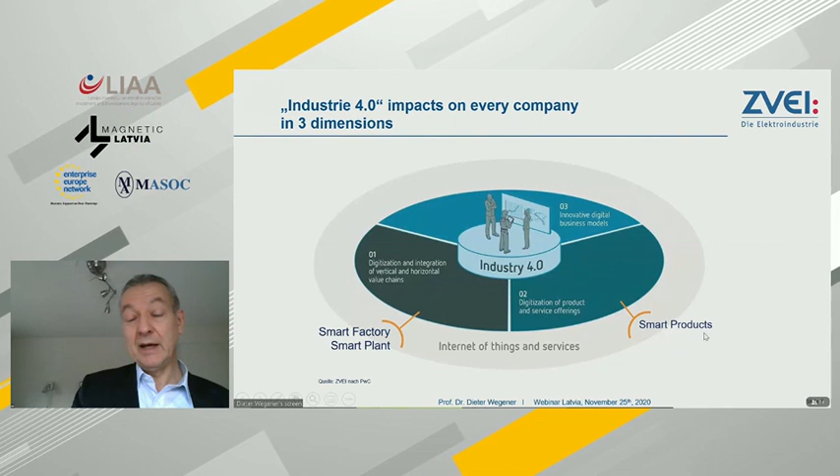The first dimension is that you digitalize the value add. The analogous value add you make out of a factory, a smart factory. You make out of a plant, a smart plant. The same for the products. You make of a product, if you digitalize it, a smart product. And last but not least, you create smart services by evaluating the data coming from the smart factories and the smart products, as I mentioned before.

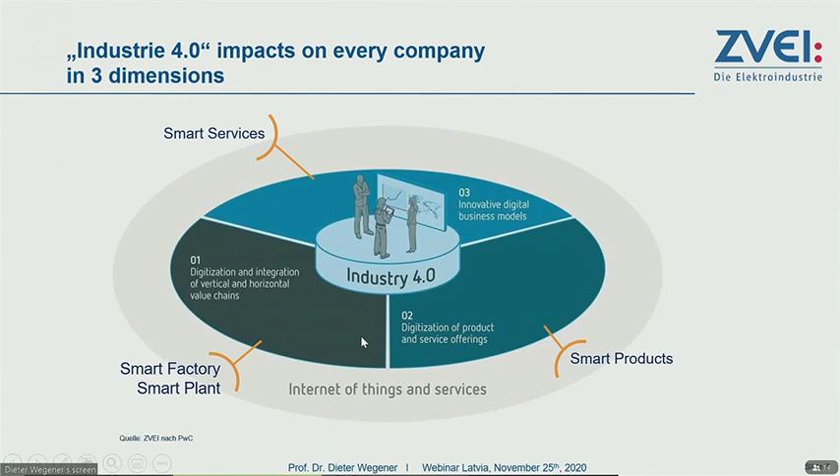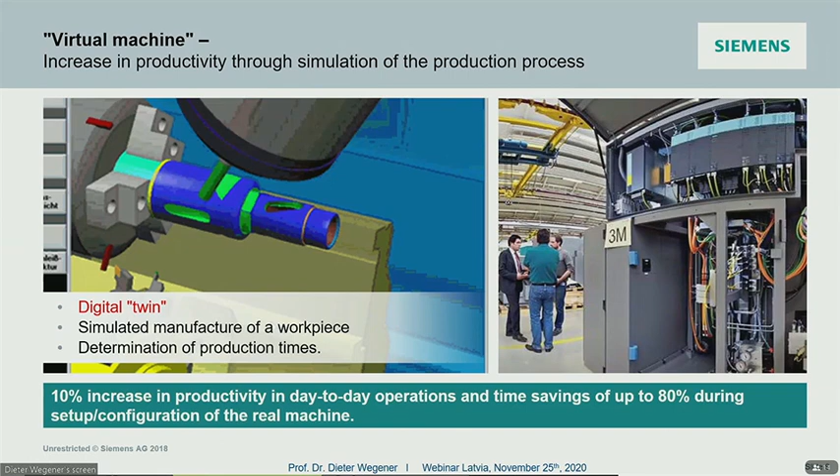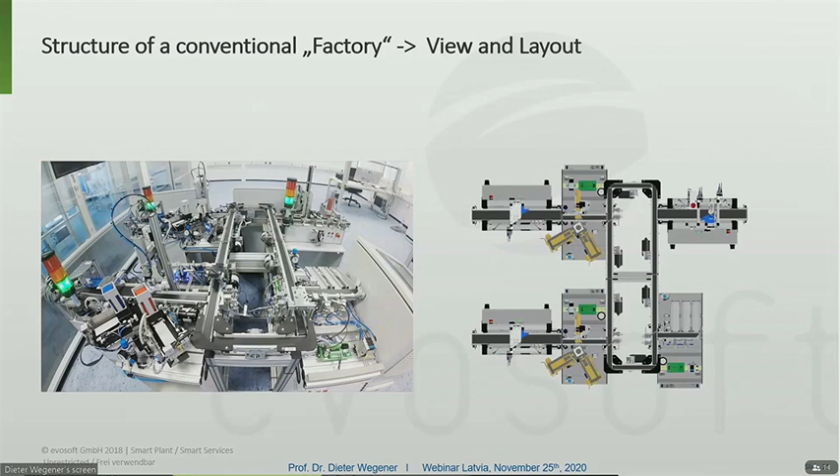Now I want to come to the smart factory, and I want to explain what it is. A smart factory - for this I take first a small factory, which you can see here. I make it a little bit bigger. You have a classical assembly line.

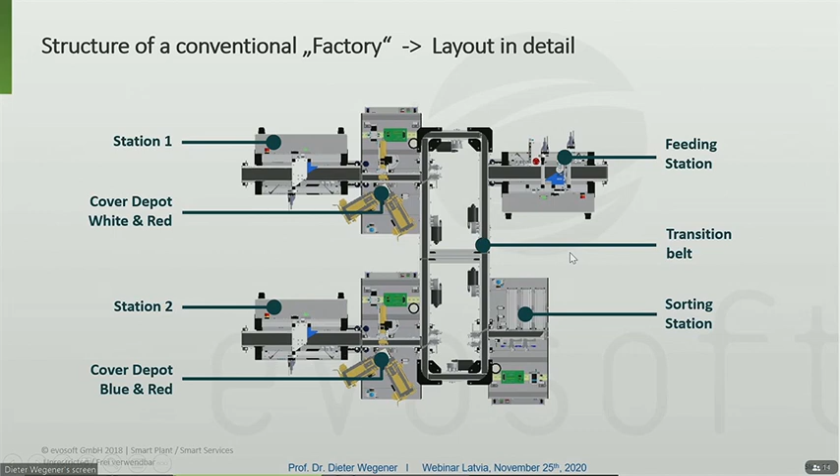You have a feeding station where you get bottles in. Then you have station 1 where you put a white and red hat on it. And you have station 2 where you put a blue and a red hat on, and then you get it out in the sorting station as an output. The transition belt is transporting the bottles through this equipment. And you have sensors equipped to have information for the automation equipment.

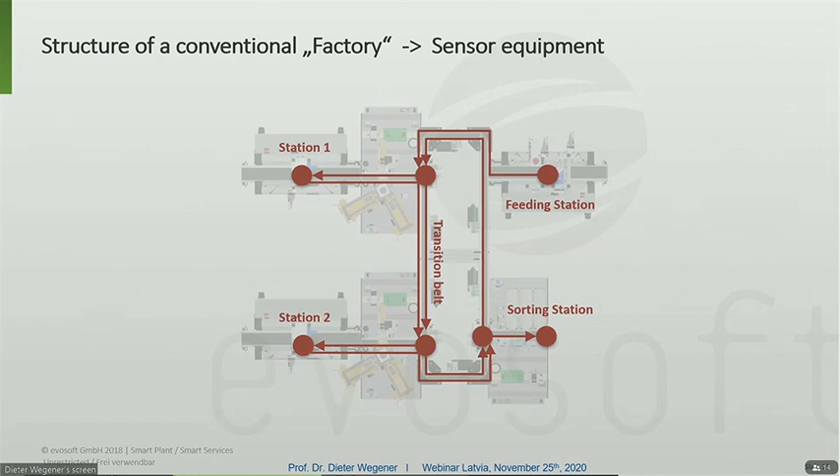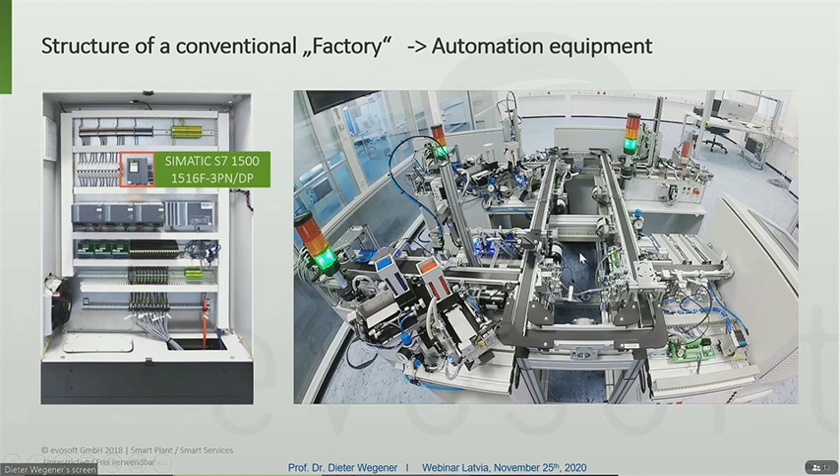And what is the automation equipment? The automation equipment is such here in a cupboard. You have, in this case, a Siemens equipment, a SIMATIC S7 1500, which is the control system for the whole setup. And you have some other boxes for driving the electrical drives and the sensors and all those things. And here is how it looks like.

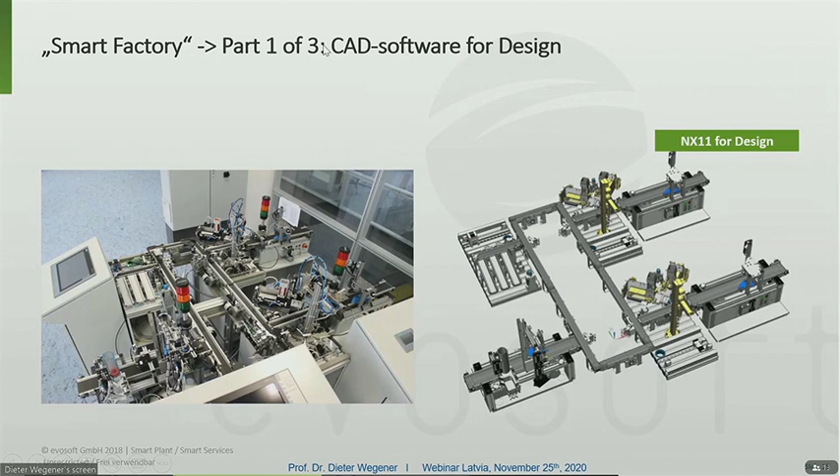Now, when you want to make this factory smart, you have to digitalize the value add. And there's a whole working stream, and by this you take first, you have to do 3 parts. First, you have to introduce a CAD software for design. And with that, you can include also a simulation tool, which is called Mechatronic Concept Designer. It's a simulation tool from Siemens, which enables you to simulate every physical behavior of your equipment in all cases.

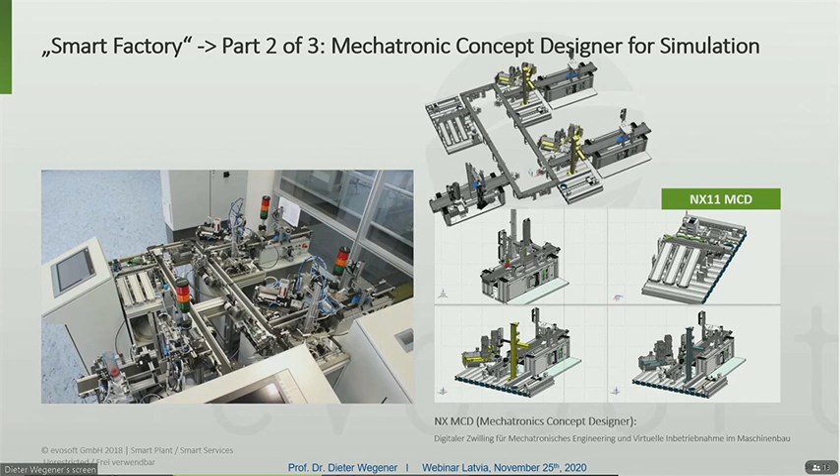So you can simulate, for example, the bottles going around the conveyor belt, under the laws of physics. And that is the mechanical side. Now you come to the electrical side. You have also to simulate the automation system, the controller, and this you do also with simulation software. It's called SIMIT in our brand name.

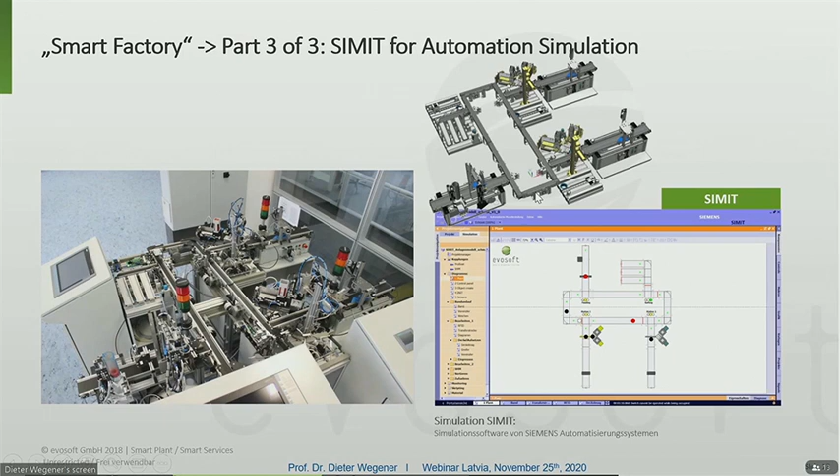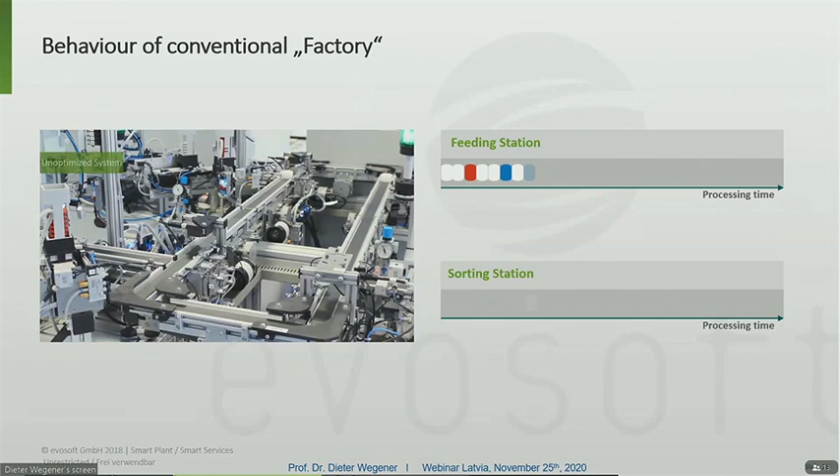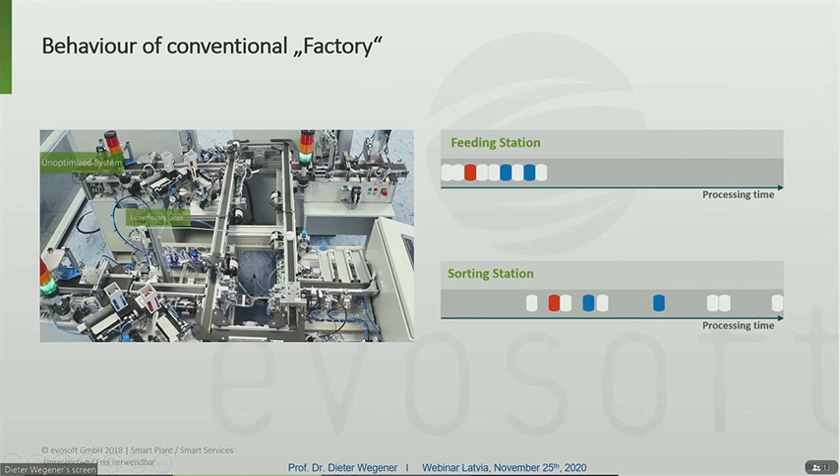And with that, you can optimize the factory. And you see here in the video the unoptimized system. Now you can optimize the design by taking care of the speed and all those things. And here you see the feeding station, and here you see the sorting station as the outcome. Now, that is the classical thing you have in all your factories.

But now, what is the smart service, and how could you apply this to a conventional factory? I want to show you this in an example. So you take the same equipment, the same cupboard, but you put in here a MindConnect Nano box, which costs approximately 800 euros, a high performance computing controller.

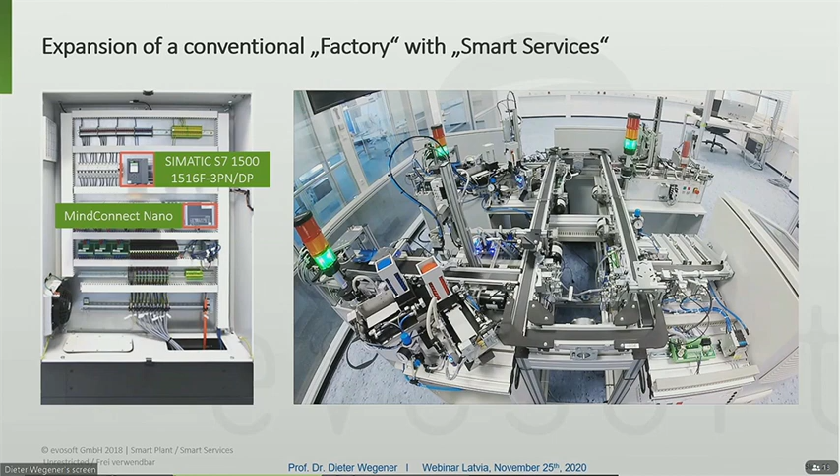And then you take a lot of software, because you need to analyze the time series coming from the sensors from your equipment, storing in this nanobox, and then these time series you put in a processor software, learner software, controller software, service-oriented architecture, user interface software. You have an operating planning software, and you have some databases to store the data coming from the time series. And this is working on a MindSphere operating system. MindSphere is the IoT platform system by Siemens. And with that, you can optimize the system without knowing the details of the system.

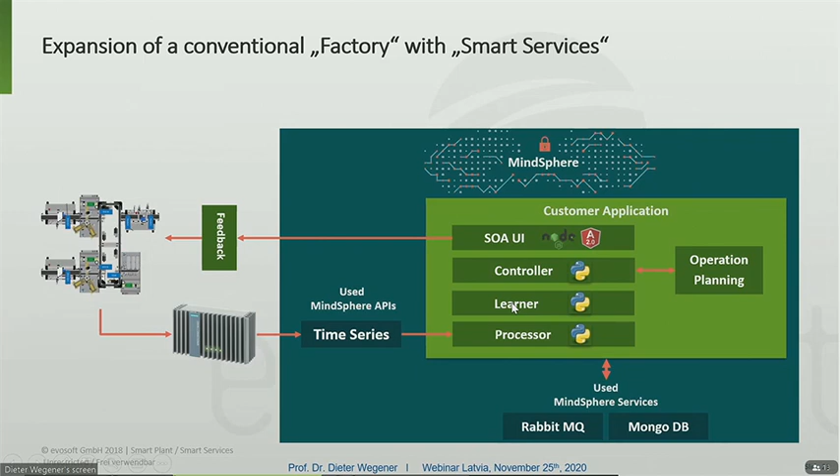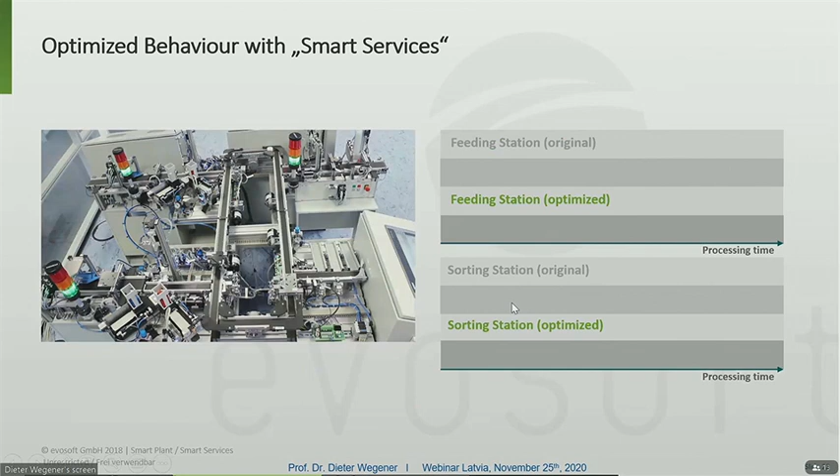The system you see here, in gray you see the original system, and in green you see the optimized system. The optimized system will avoid all issues, solving with the help of artificial intelligence to find the global optimum. As a result, the optimized system is much faster.

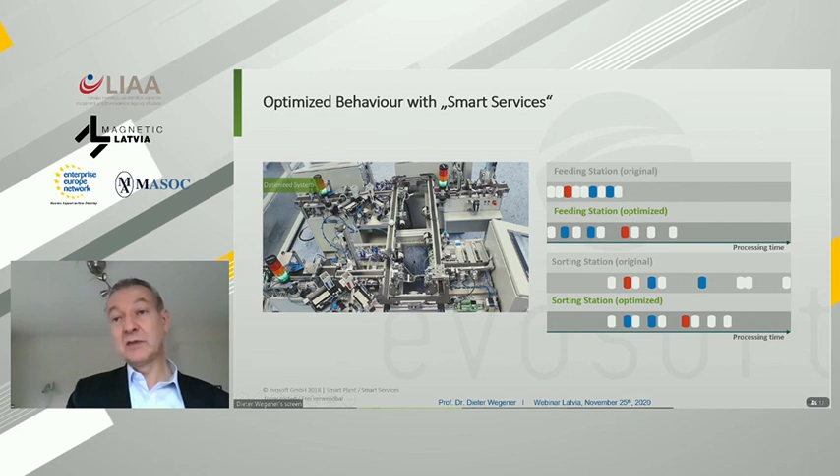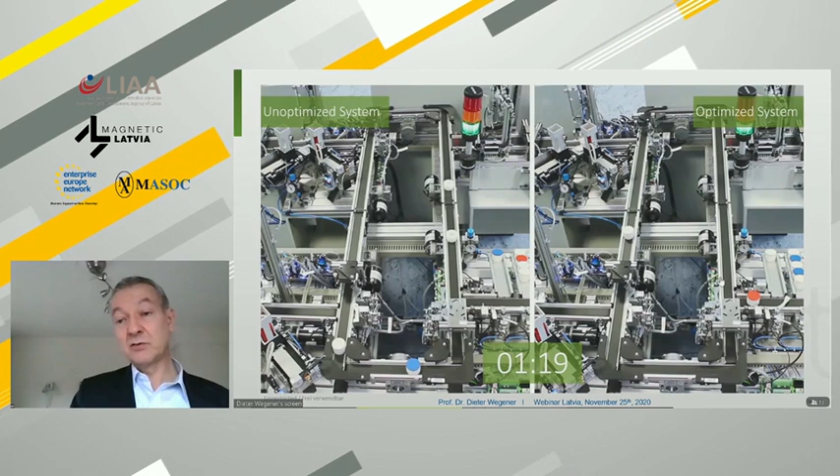Here you can see the left-hand side is still running, and the optimized system on the right is now ready. It is still working because of the unoptimized structure. Now you see the result.

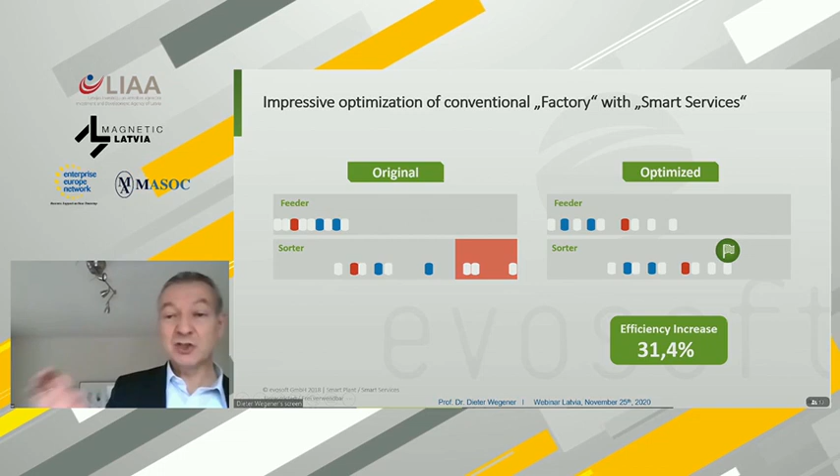If you take the smart service to optimize your factory, then you can increase your efficiency by 31.4%, just by using software tools, a MindSphere platform system, and artificial intelligence for optimizing.

And what do you have to invest? It is very simple. You have to take the same factory as you have, but invest in this MindConnect nanobox on the hardware side, and invest into software systems, cloud integrations, the simulation license, and develop your app on this, which is very easy when you have experts in your team.

In this case, the break-even was lower than one year. That is very promising, and I would recommend that you apply smart services to your equipment in your factories and process plants.

Now I want to share the German initiative on Industry 4.0. In ZVEI, we formed a team, the so-called ZVEI management team, Industry 4.0. There are a lot of members, small and medium-sized enterprises, but also big companies like Siemens, and of course research institutes and other partners. We also have a German political platform, Industry 4.0, which is funded by the Ministry of Economy and the Ministry of Research.

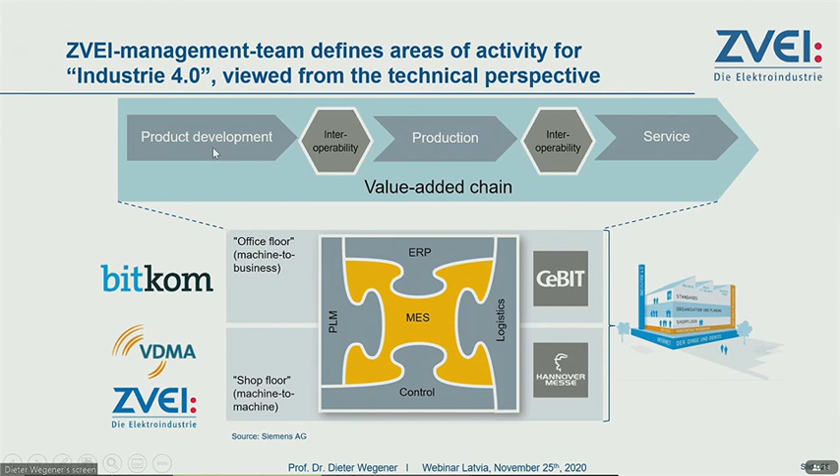We work together in a huge network in this community. The main task of Industry 4.0 is to bring the operational technology in the shop floor together with the IT, the information technology in the office floor, along the value chain, simplified here as product development, production, and service. The major challenge is to increase the interoperability along this value chain, and to raise up the interoperability between the shop floor and the office floor, between the OT and the IT.

Now, what we do in the ZVEI management team is define an Industry 4.0 component, which is similar to the definition of a cyber-physical system. This is a concept which works for all industries, from process industries over hybrid industries to discrete industries. What is it? It is a normal product, an OT device, which is...

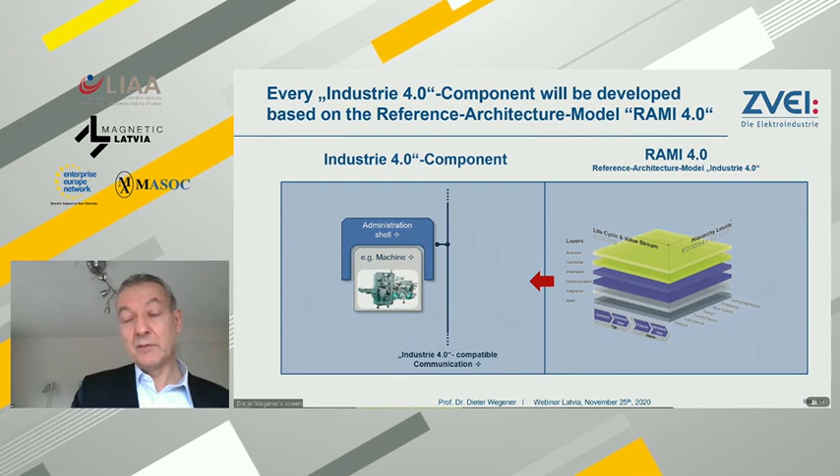supplemented with an asset administration shell. Here's a blue shell. This asset administration shell enables this Industry 4.0 component to have an Industry 4.0 compatible communication along this reference architecture model Industry 4.0. You can get into the details if you go on the Platform Industry 4.0 homepage, where you have a lot of documentation and illustrations of this concept.

Just to give you an idea, for the communication layer, there you see all those protocols. Perhaps you are familiar with TCP, IP, 4G, and in the future, time-sensitive networking and 5G, if it's mobile.

So the strategic approach in the Industry 4.0 initiative is, in a nutshell, on one page, to enable digital economy with the help of the definition of this Industry 4.0 component, introducing the I4.0 component with this asset administration shell on the right-hand side to connect OT devices with this IT world.

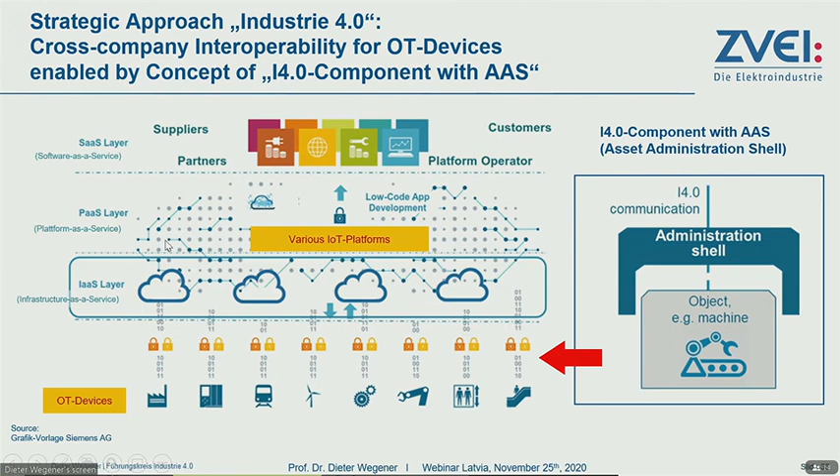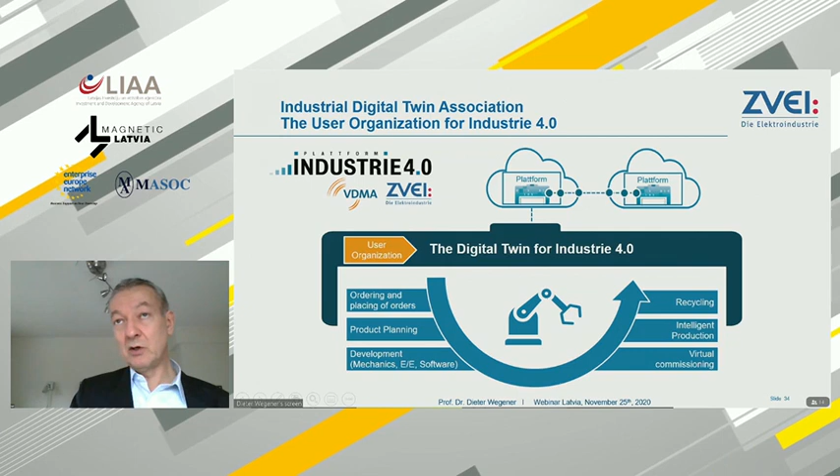For this purpose, the German associations ZVEI and VDMA formed an Industrial Digital Twin Association as a user organization for Industry 4.0 on the 23rd of September of this year, so just brand new.

We are also working on a digital nameplate 4.0, which enables us to connect every OT device via a QR code to come to a valid standard, to come to a link on the internet, which is defined by this standard DIN SPEC 91406. For those who are interested, please go into this link, there you get more details.

Now I want to share a little bit in the last minutes what Siemens is doing on Industry 4.0. You know this concept which I explained from the association viewpoint, and Siemens has this concept.

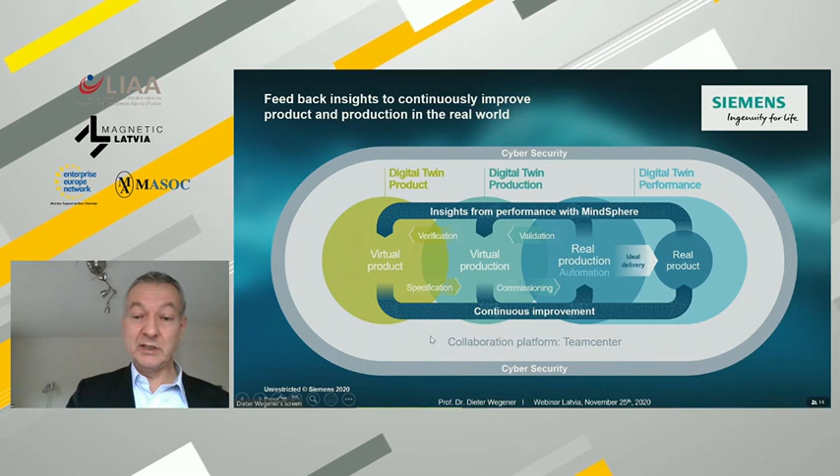It's the same, but just in a marketing illustration. We call it the digital twin approach in product design, in production, and also in performance. It is very important that you need platforms, a platform for the engineering side, and also a platform for the data coming from the devices. That is MindSphere, which I explained already. And of course, this is all covered with application of cybersecurity means.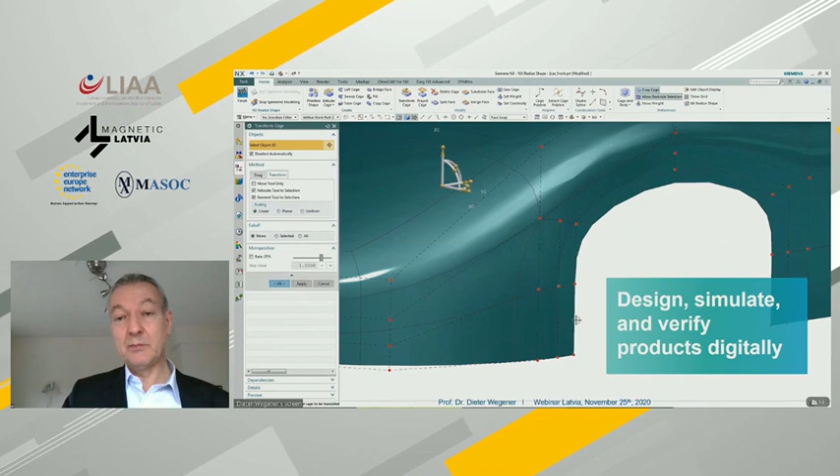Just to give you an idea, the virtual product: we make a design with digital twin. Here a car body, a framework of a fuselage, here a lever, and you can simulate everything you like, also PCB boards and electronics, and aerodynamic flow. You can simulate a wind tunnel, make honeycomb structures, and do everything with simulation using our tools.

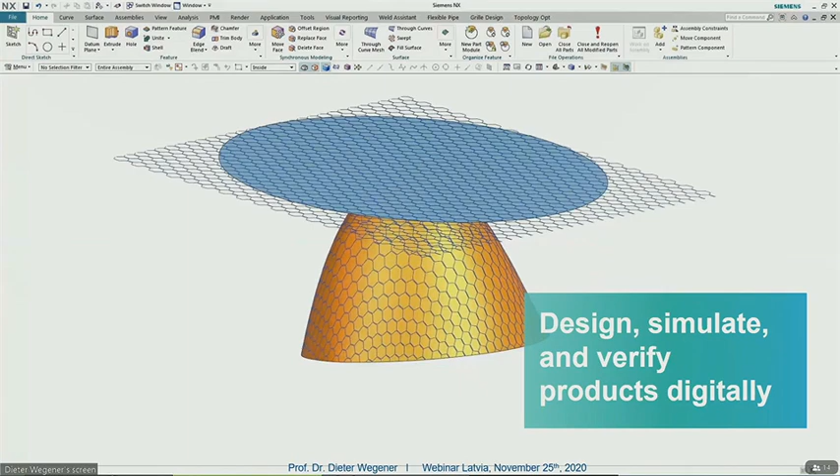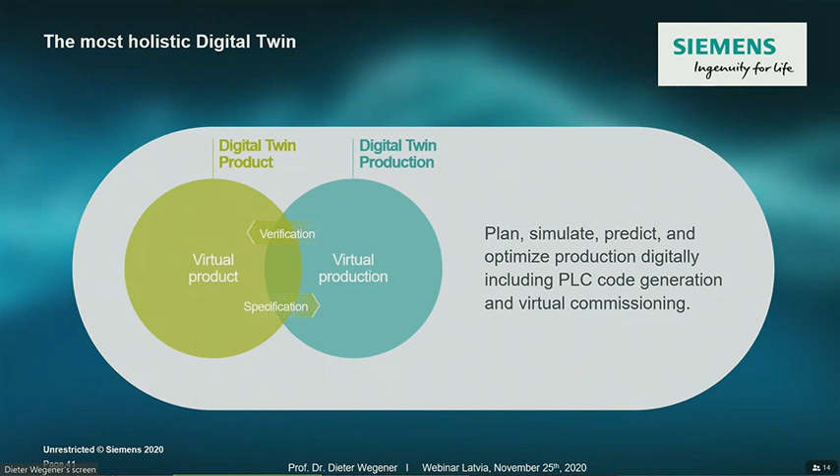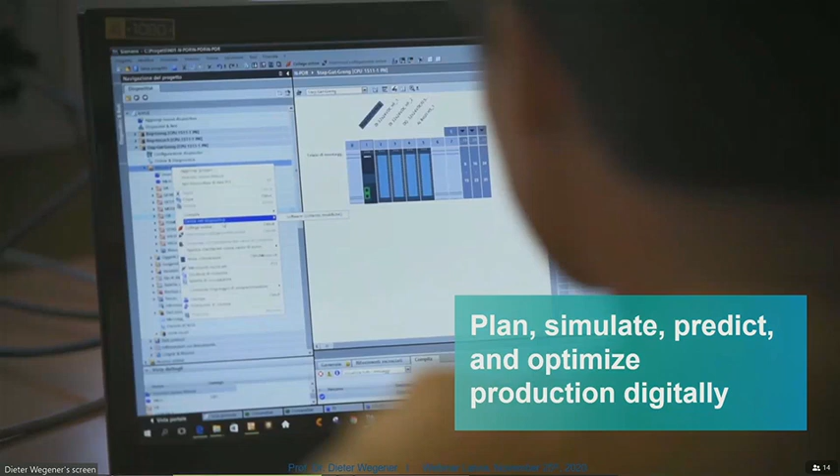Then you move into the virtual production scene, where you think about how to make the production, but first in the computer. Here you see some applications on the shop floor with robots, or in the pharmaceutical area, or in the assembling of an airplane fuselage or airframe, or in the electronic arena, or here a honeycomb where you produce it. So everything can be simulated with software.

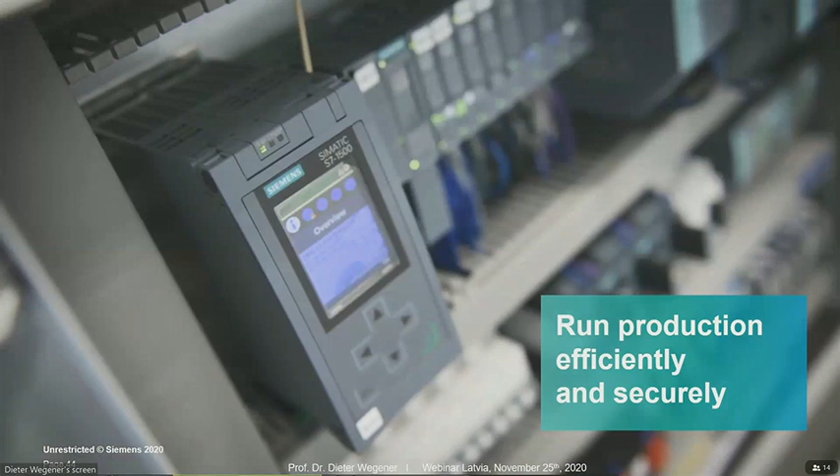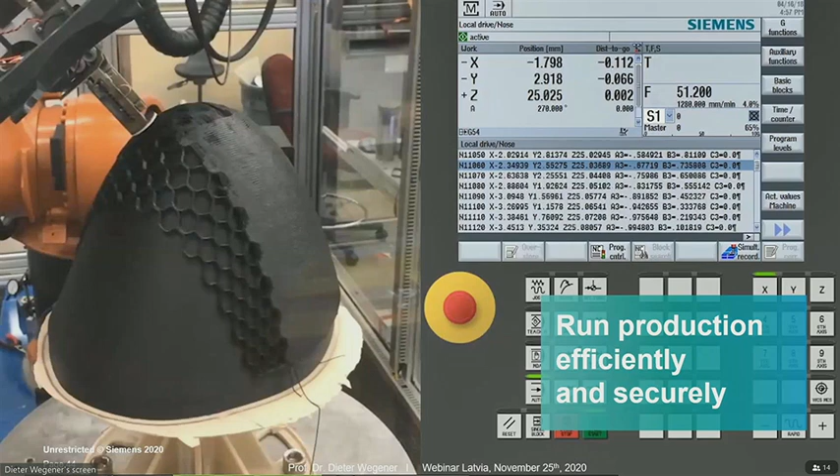And last, now you go into the real production. In the real production, this is what it looks like if you go into a factory or a process plant. You see a lot of automation equipment, and this is enhanced with the MindSphere IoT platform.

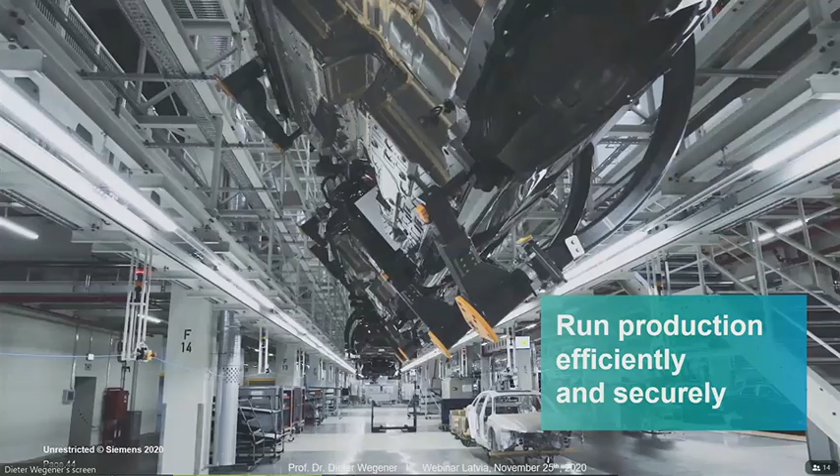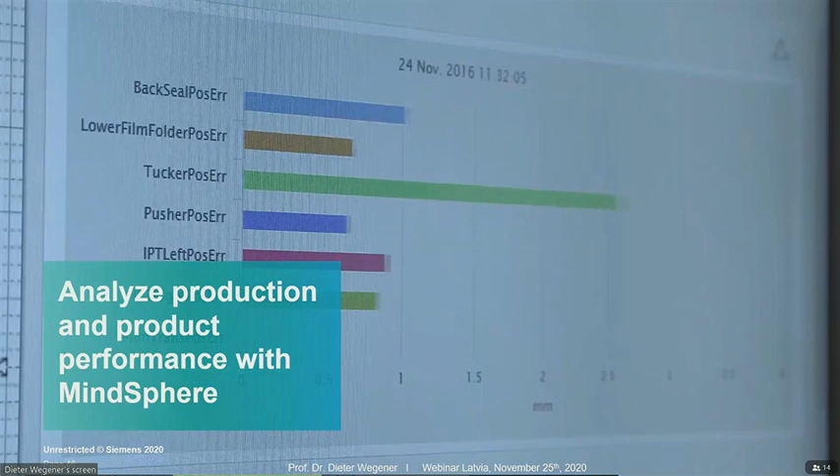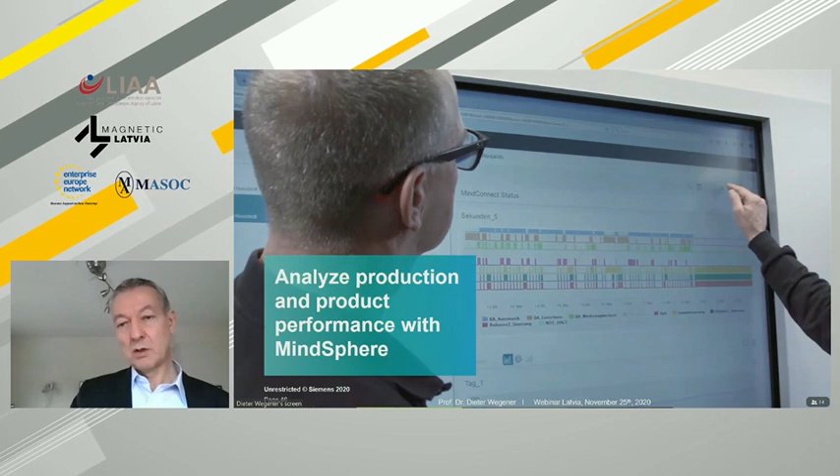So you can evaluate also the data coming from the production. That is shown in the next slide, where you analyze all the production and product performance with the MindSphere IoT platform. That is something that lets you improve your efficiency with the use of analytic tools.

Now I want to finalize with two examples using artificial intelligence. One is in our factory where you have a production line for welding PCB boards, and X-ray inspection is necessary to control every part coming out of this line. Normally we want to increase the volume of the production line, but the X-ray step was a bottleneck. So to avoid investing in a new X-ray machine, we introduced artificial intelligence.

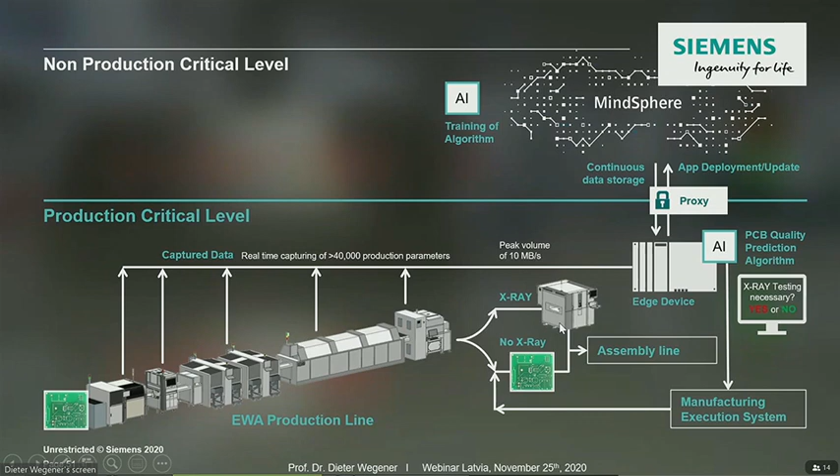So how do we do it? We take the data out of this assembly line in real time—more than 40,000 production parameters for each time step. We put it into an edge device, send it to the MindSphere platform, and apply artificial intelligence training software. This learns from the data, and the outcome was that we could avoid investing in a new X-ray machine to overcome the bottleneck by analyzing this data from the assembly line. We could minimize the X-ray testing by 30% while keeping the same quality rate.

The effective number is 99.9988%, and we saved 500,000 euros by using this artificial intelligence.

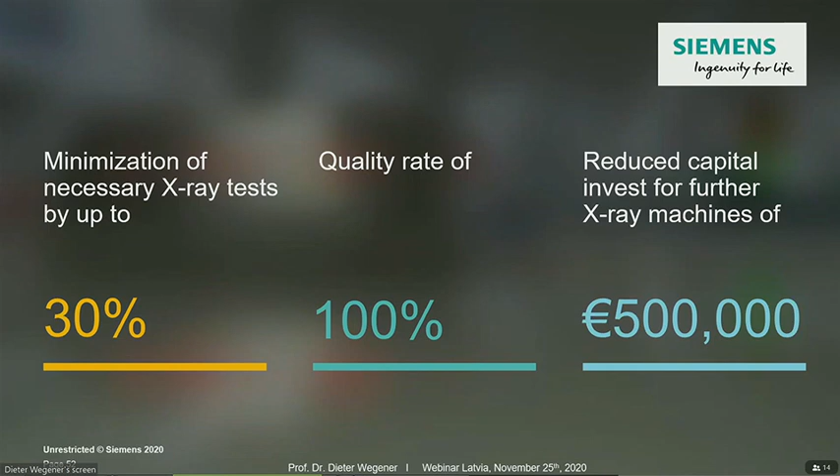The next example comes from Heller, a customer of Siemens doing machine tools. These machine tools have a rack where you place the tools, handled by a robot. The question was how to optimize the placement of the tools, because the farther away the tool, the longer the distance and time needed for the robot to bring it to the machine. This optimization is not analytically solvable.

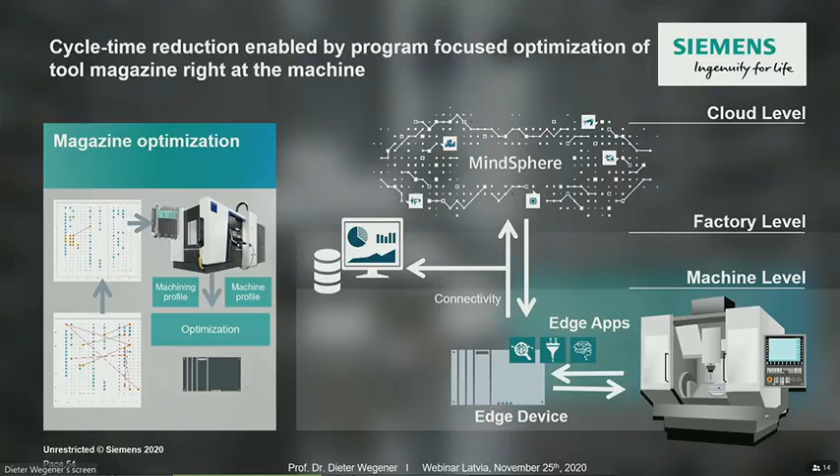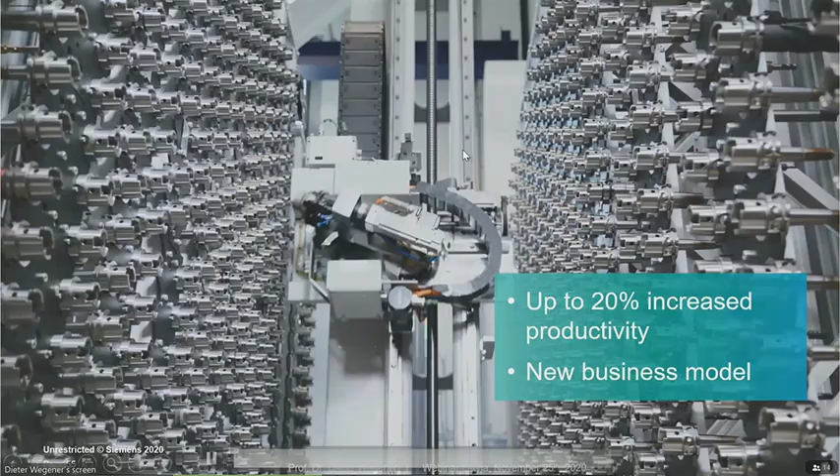So this was done by applying artificial intelligence on the MindSphere platform. The outcome was optimized, as you can see in the simulation, by putting the tools that are often used in the middle and those not so often used in the corners. That is very pragmatic, and we increased productivity by 20% by doing that.

And Heller is selling this as a new business model, as a smart service to its customer base.